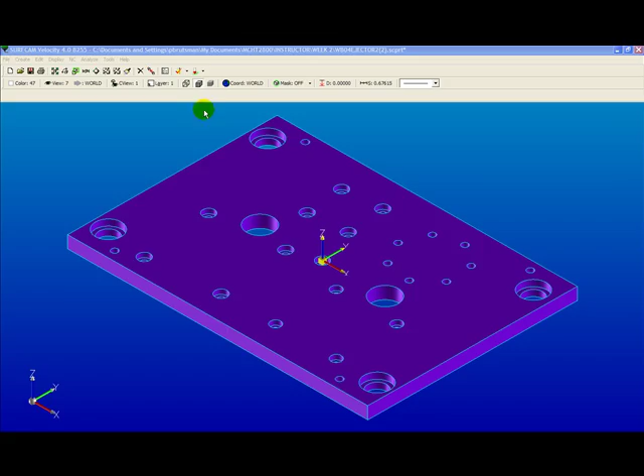So let's get started. First thing I'm going to do is turn off my surfaces layer. You'll notice that I already have the part oriented. The X and Y is at the center of the part and Z0 is the top of the part. So I'm going to go back to my isometric view.

What I want to do here is change the color of the top of the counterbore wireframe geometry. That's actually rather simple. The first thing you do is go edit color, pick a color from the color palette. I'm going to pick a dark blue here.

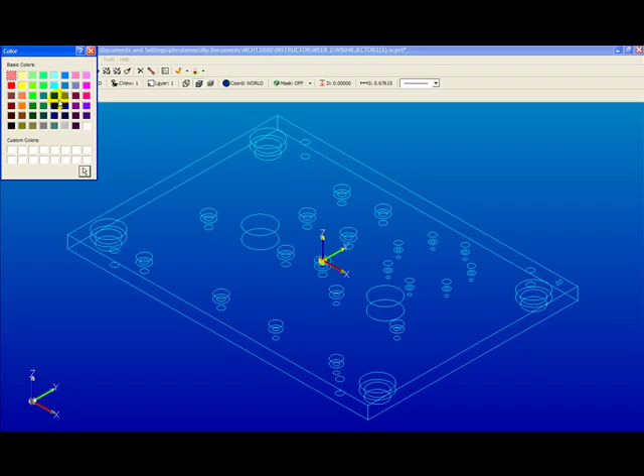And all the 1/4 inch counterbores, I'm going to change those to blue. Now the thing you have to realize is that you don't know what size they are and it's not called out anywhere. So the first thing we're going to do, hit cancel, is figure out what size the counterbores are.

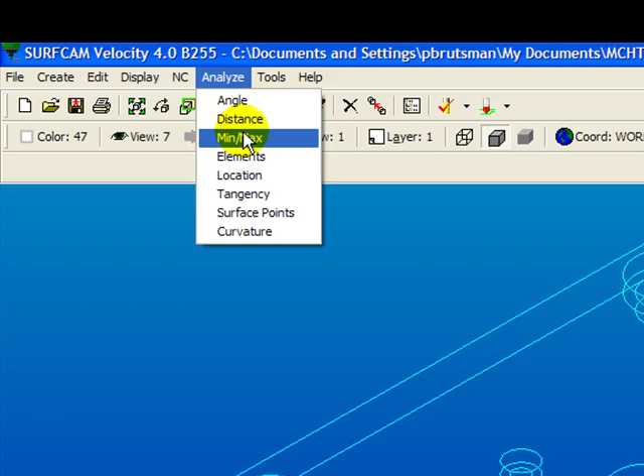So I'm going to go analyze element and check each of these, and sure enough that piece of wireframe geometry is a .468 diameter. This one here, oh there's my 1/4, okay, and these here are my .406.

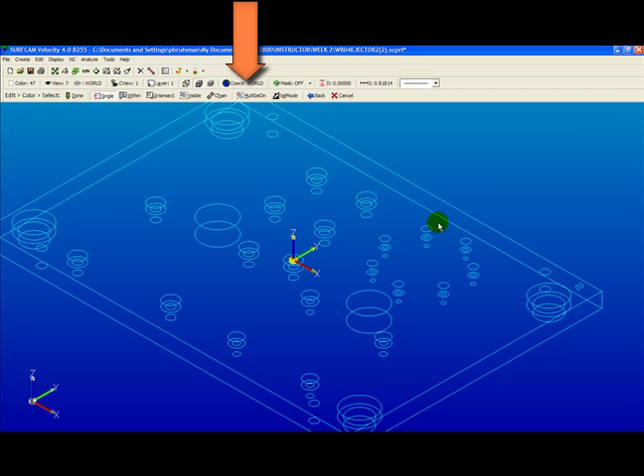Alright, so now that I have some idea what's what, I'm going to start again and go edit color, pick the color blue, and all my 1/4 inches I want to be blue, so I'm going to make sure multi-select is on. I'm going to come select the top of the geometry of the counterbore, the part of the geometry that's at Z0, and say done.

If I hit back, I can then choose my next color, and the .406s I'm going to make some pink or magenta. So the .406s, I believe, are over here, so I'm going to select that one, that one, that one. Okay, I believe that's the .406ers.

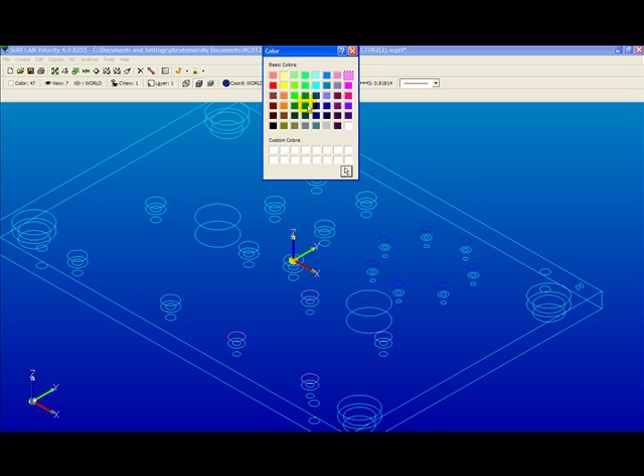And then if I hit back, I can choose another color. On the .468s, I'm going to make this an olive color. I believe that's them. I'll hit done. And you'll notice on the screen that those now are different colors.

When you're done, just hit cancel. Cancel doesn't cancel the command, it just simply says I'm done changing the colors of some geometry.

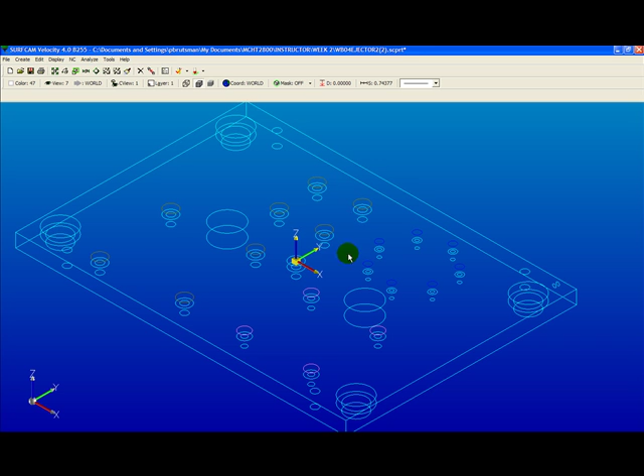Okay, now the key reason that I did that is I want to be able to select all the blues at one time, or browns or pinks, depending on the operation that I'm doing. So let me demonstrate this.

I want to do some center drilling, so I'm going to say NC 2-axis drill from the pull down menu. And it says what do you want to drill, and it only recognizes points or circles for the holes. Well, one thing to note is we have a lot of circles on here and it doesn't differentiate where the circle is, whether it's on the top of the part or the bottom of the part.

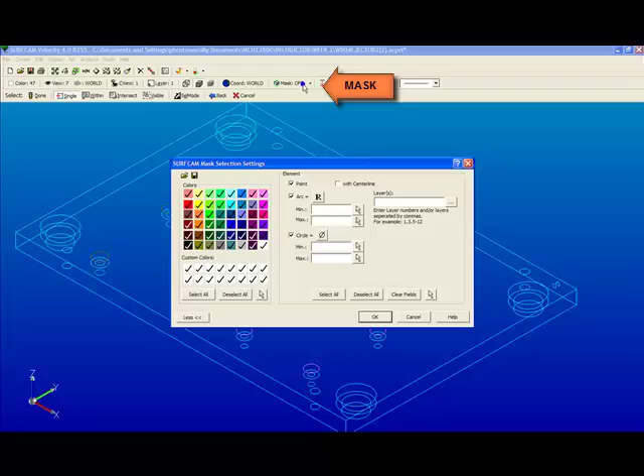So with a new tool called our mask, if you click mask, you'll notice that we have this great tool that we can say only pick geometry that's certain colors. So here's how I do it.

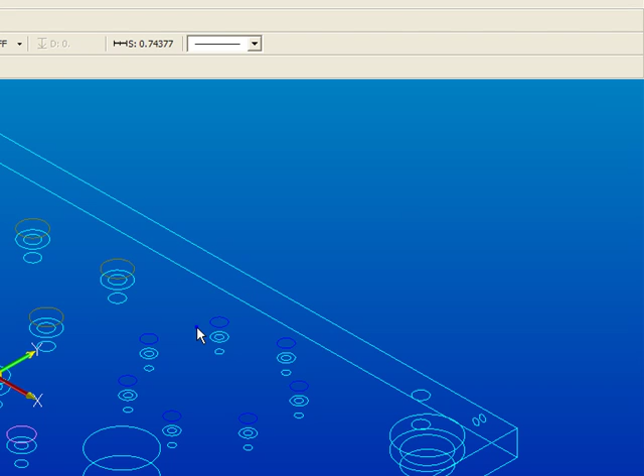I say don't select any colors but, and pick the colors that you want it to grab by simply picking the arrow, the cursor, clicking there, and notice that the check boxes are starting to show up of the different colors that I want. And I'm going to say OK to this.

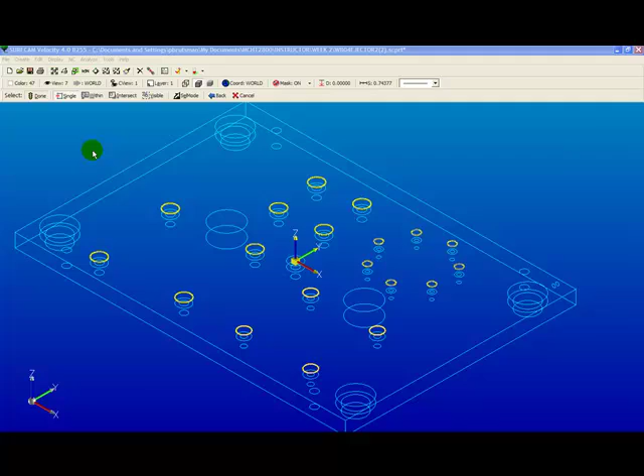And now when I say NC 2-axis drill and this menu comes up, I can say, hey, all visible colors. And I can say done. Alright, and now only those holes were chosen, you can see.

And now I go in and pick my tool. Here I'm going to pick a center drill, a number 3 center drill. So you have to come in here and look at the drill tool table, and sure enough, there's a number 3 center drill there.

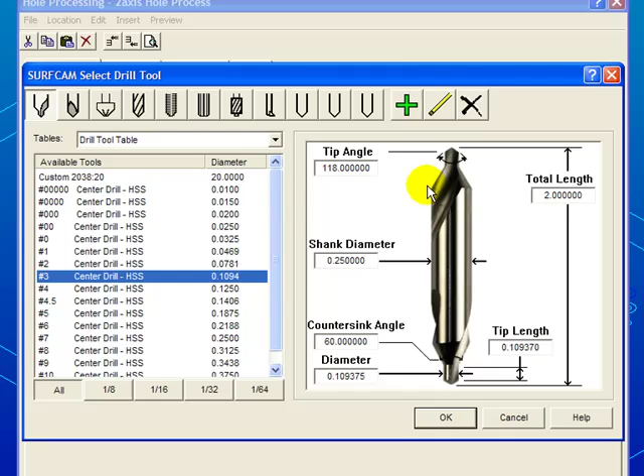Now you have to understand what number you want that tool to be when you're working with this. So I say OK, and it's kind of handy, it gives you a preview of what a center drill is. I'm going to make this my first tool, tool 1, my length offset 1, and my work offset 54.

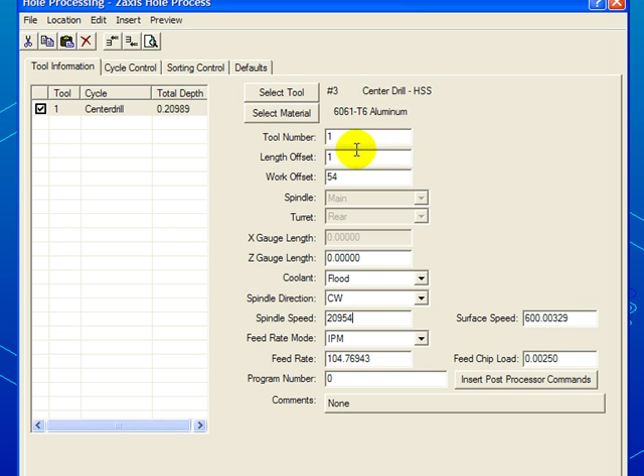Be careful here, notice that the spindle RPM will sometimes exceed your machine, so you'll have to go in and put appropriate values for your machine right there. We'll look at the tool material, it's high-speed steel. We're not drilling aluminum, so we're going to change that material to a steel of some sort.

We'll look through here, we'll go to, I don't know, low carbon steel Rockwell 30 to 40C, something like that, and we'll say OK. I'll get much more reasonable RPMs at this point.

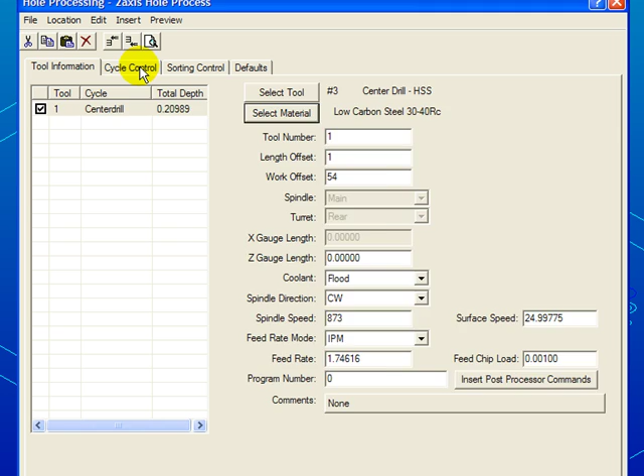Next thing I'm going to do is go to cycle control. This is where I control my rapid plane, my plunge clearance, the type of drilling cycle, and the actual center drill diameter. The defaults here are pretty good — it doesn't drill too deep with a center drill.

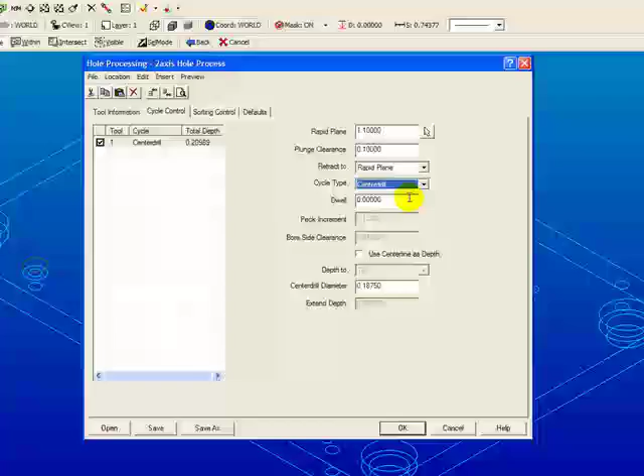By default, it goes about 2/3 of the way up the flute, which is what you want. If you want to peck the center drill, you can choose peck instead of center drill, whichever you want to do. And you say OK, and now Surfcam has put that toolpath in there.

That's a real quick overview of how to create toolpaths, drilling toolpaths in Surfcam.